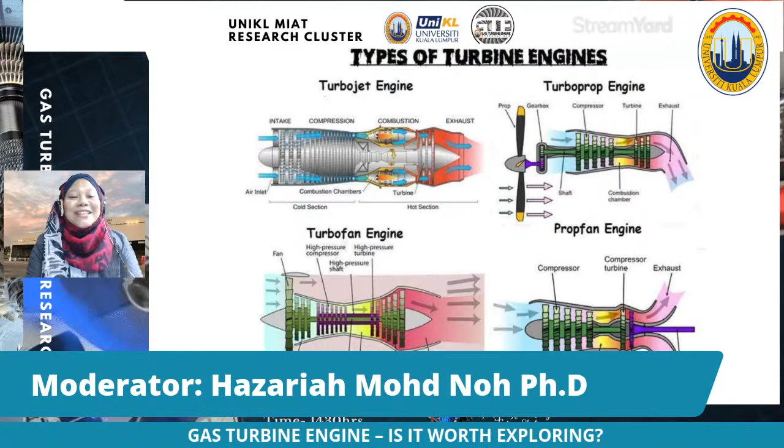A bit about the gas turbine engine: I know most of the audience are well versed in the aviation industry, some from oil and gas, and even some from power plant turbine engines. Just briefly, we have different types of turbine engines: turbojet, turboprop, turbofan, and prop fan. So we may learn more details from the panelists on what type of turbine they use in their field. As for the operation of gas turbine engines, we have power generation, aviation turbine, and also oil and gas turbine.

So, let's not waste any more time. I will call up the panelists for today. Let me stop sharing this. Okay, so I will call the first panelist up to the stage.

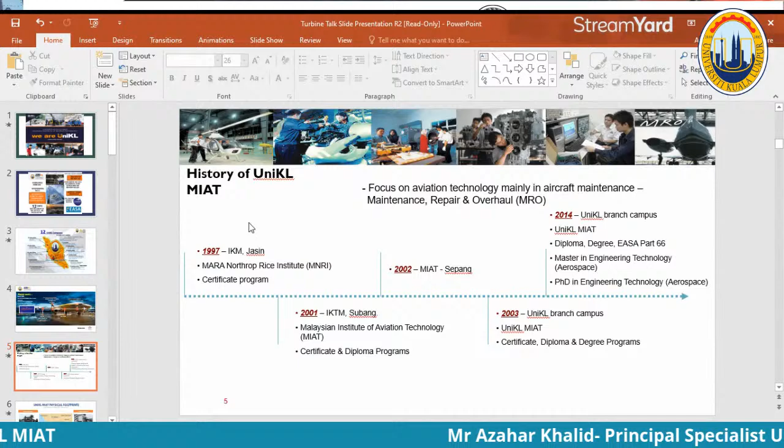This is a historical view, as mentioned earlier, going way back to 1997. It was IKM, we joined Jasin, and at that time in 1997 we only offered certificate programs. Then in 2001 we were on our own and called it Malaysian Institute of Aviation Technology. Then Mara and the government grouped us to become a university, and in 2002-2003 we became part of University Kuala Lumpur. That's the progress shown earlier on that slide.

Basically, this is our campus in Sepang. The front, the admin block, you can see from the aerial view. And over here, it's the new Subang campus, not new anymore, I think it's already 4 or 5 years. We have the admin block and also the hangar facility. The only difference here is we have the apron and we have the hangar.

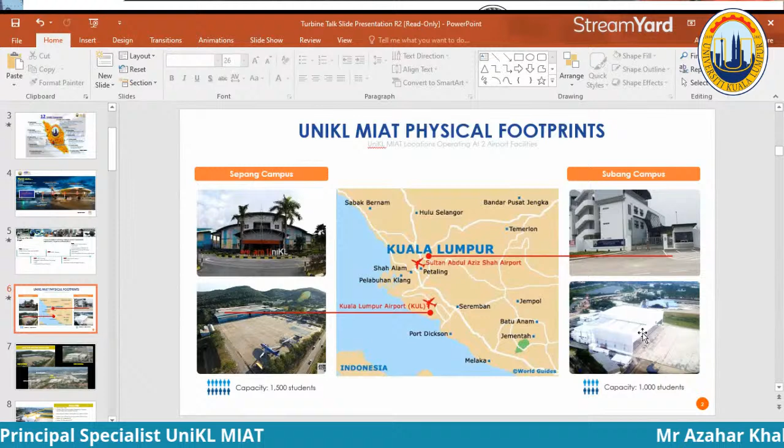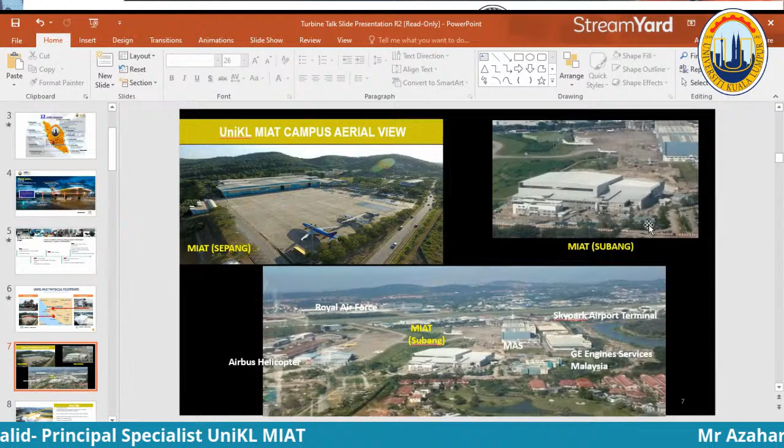This is the aerial view of Sepang, on the other aspect. Similarly with Subang, this is the overall view in Subang. The facilities we have here in Subang include the admin block, academic block, classrooms, faculty members for training workshops, the hangar support, hangar 1 and hangar 2. These two hangars are the ones where we can park one narrow body aircraft and one wide body aircraft, a Boeing 747 or 737. It's possible to go in there to have it.

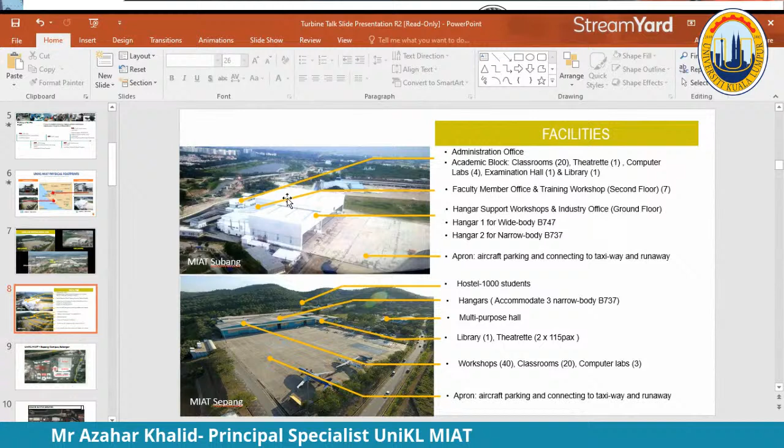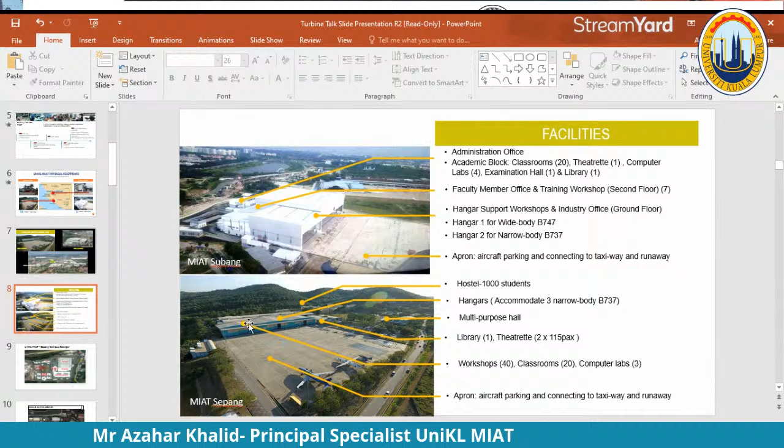Basically, the airside area is controlled, so that's where the security is. And over here is your Sepang campus, the main campus actually. You can see these are the hangar buildings, and behind it are the classes and blocks, and the workshops.

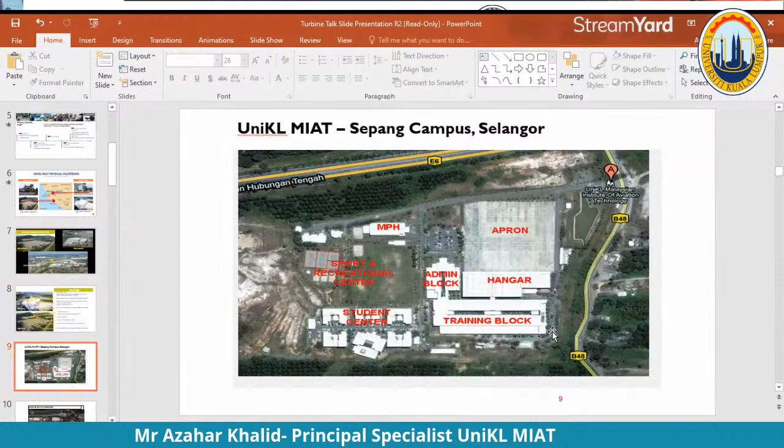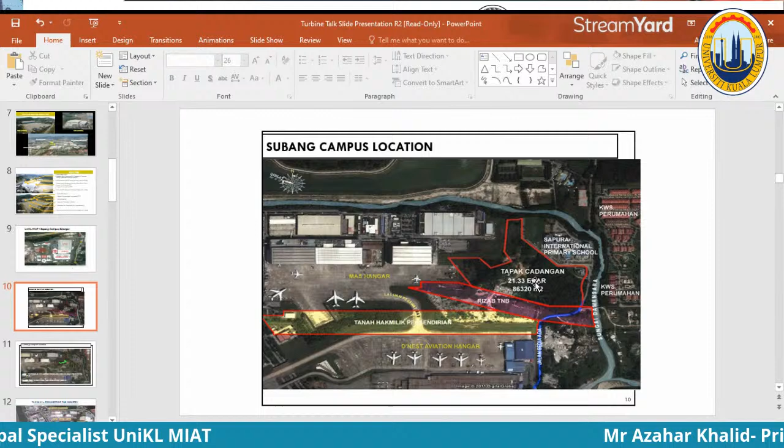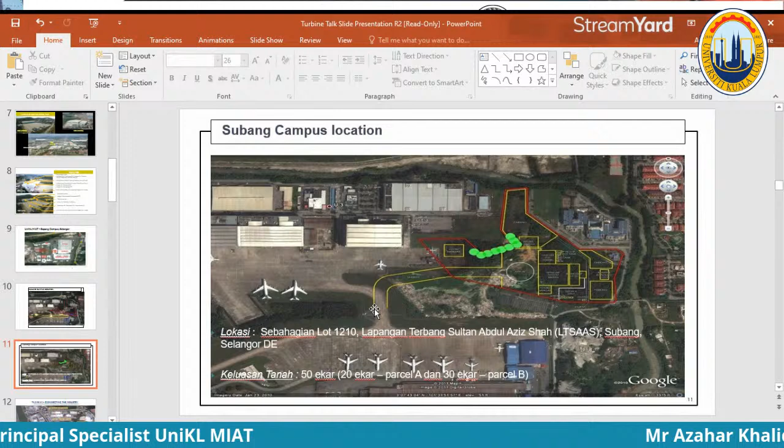Here is the earlier Sepang campus aerial view, and similarly the Subang campus. This was way back, this picture was taken before we started, when we had this only as tapak cadangan. And we just started to set up the Subang campus, way back in history. Similarly, this is the Subang campus location, the yellow part, and this is supposed to be the taxiway for the aircraft to taxi in and out.

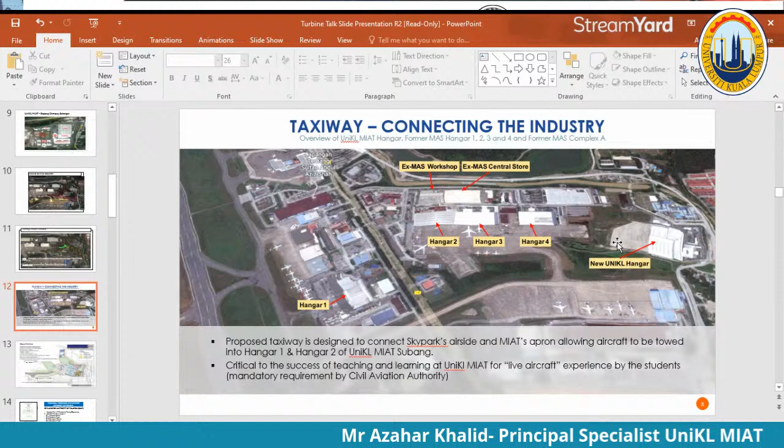The technical programs that we have are basically the CAAM, Civil Aviation Authority of Malaysia, approval 147, which is a maintenance training organization. We are authorized to conduct courses for these trades: aeroplane turbine, aeroplane piston, helicopter turbine, helicopter piston, and also avionics. These are all for maintenance engineers, so that is the approval from Civil Aviation.

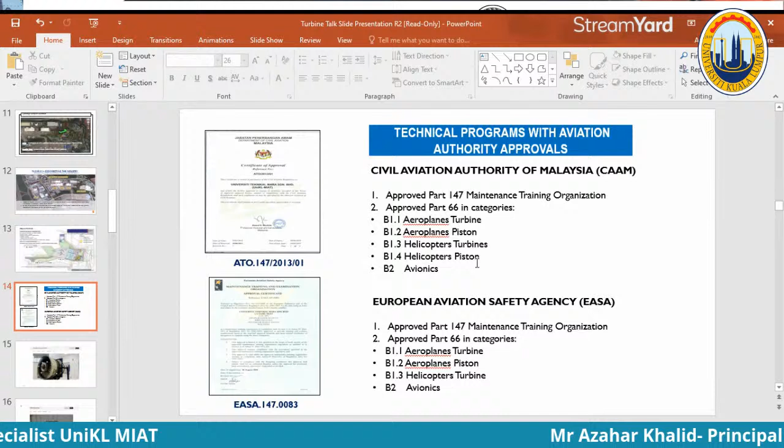Similarly, we also have EASA approval, which covers most of these, we do not have the helicopter piston. These are current, and we are conducting courses for both of these programs.

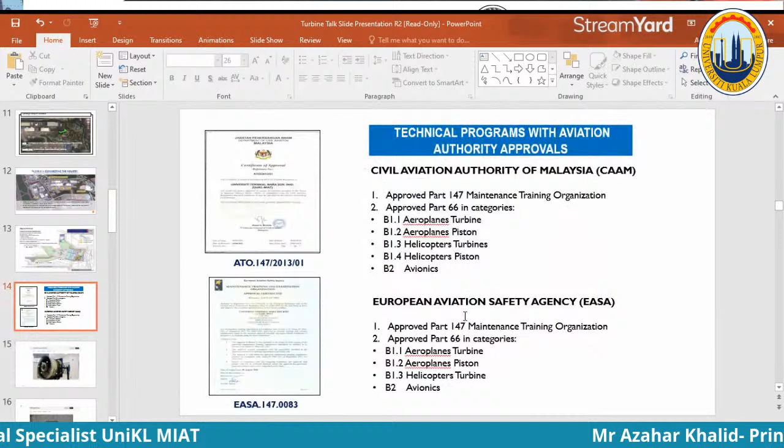Apart from that, at MIAT, being from an industry background in aviation, I have the opportunity to conduct classes. We give gas turbine classes for both the diploma and degree programs, the bachelor in aircraft engineering technology, and also for diploma programs.

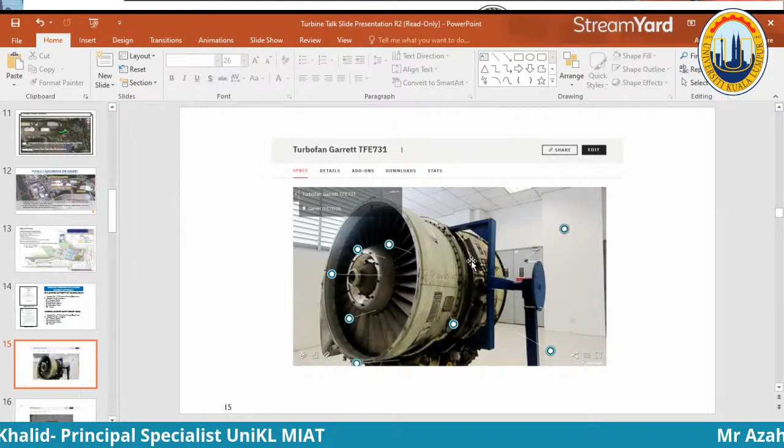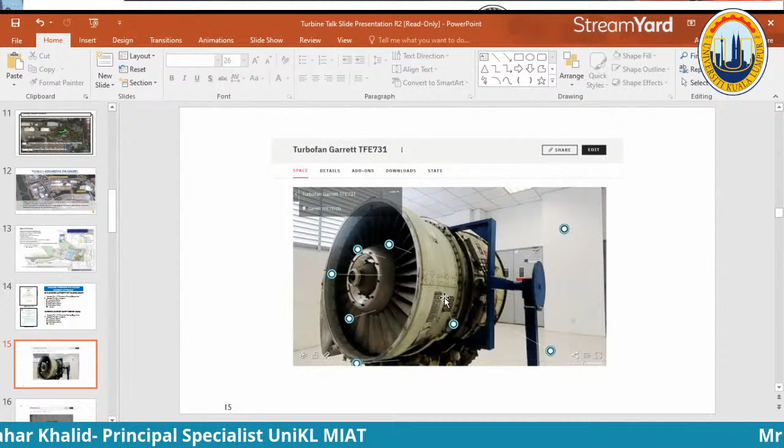So these are the workshops. This is in Subang, where we have a turbofan Garrett TFE 731. This one is static and we can disassemble it. There's also an electrical engine which is operable, so you can do a full engine run, not actually full, up to idle power, to see the operation of the engine.

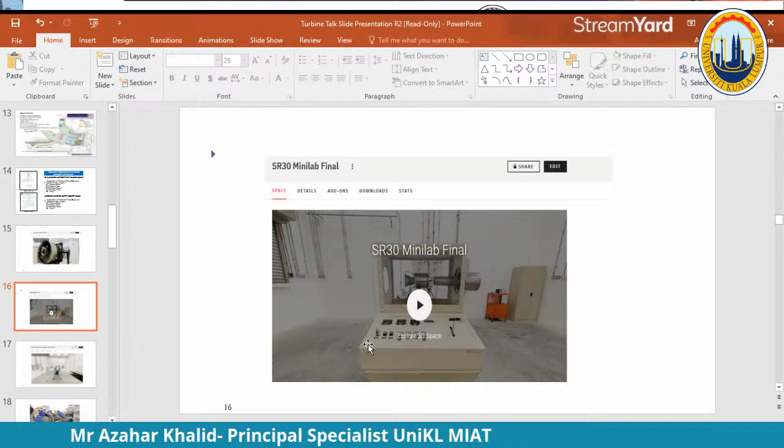So this is the mini lab, which is also stationed at the Subang campus. It's a micro turbine, made by turbine technologies, which we use for our lessons in thermodynamics. It helps in understanding the thrust and the flow of air through the turbine and so on. This is one of the equipment we use to teach the students, so they have the opportunity to understand and learn from the equipment we have. And this is another piece of equipment, a turboprop, the PT6 turboprop.

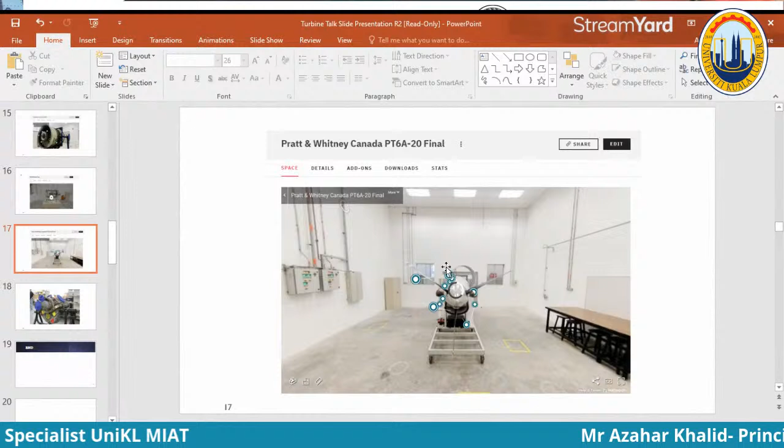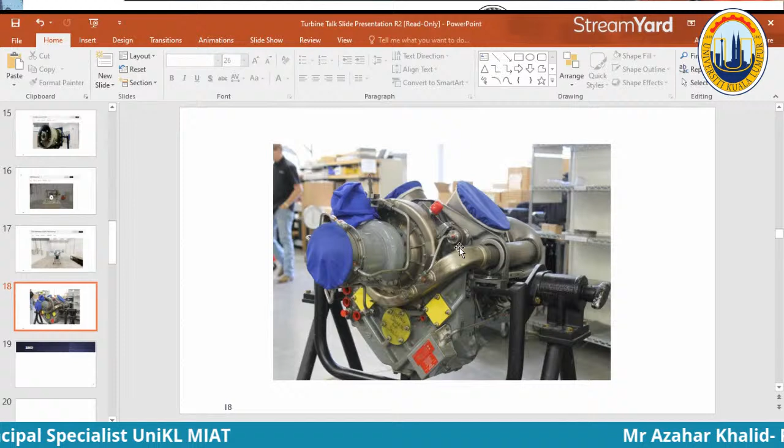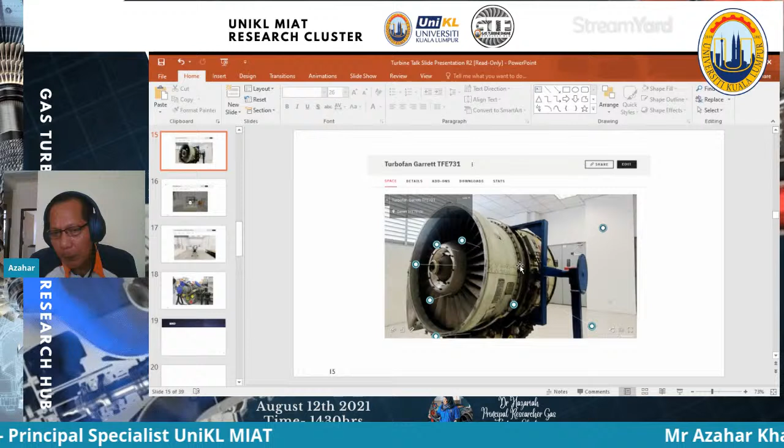So basically, these equipments are maintained in Subang and also in Sepang. We have similar equipment in Sepang, and besides our theoretical lectures in the classroom, students have the opportunity to actually work on this engine hands-on. That is the advantage of having this equipment in the university, where students now, though it's not the latest technology of gas turbine, the fundamentals are the same.

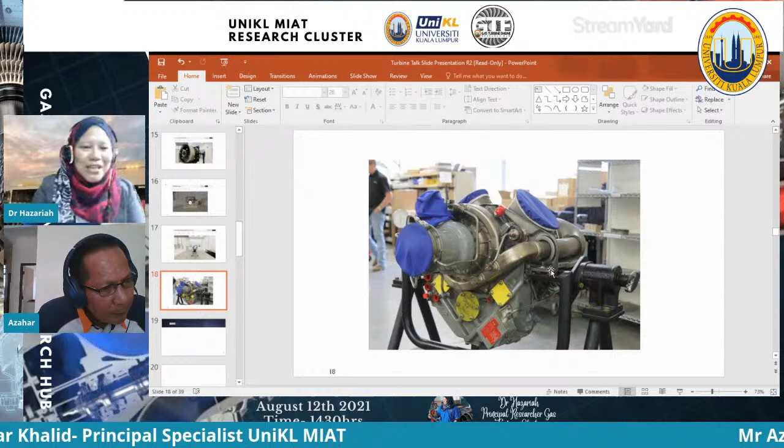So we have Dr. Harris here. Dr. Harris, I know that we at MIAT are talking about the gas turbine engine aeroderivative being used for aviation. This is very interesting, and we already have lots of comments, with close to 100 over participants watching us now. Dr. Harris, you are from the oil and gas industries, from the big companies in Malaysia, so it will be an honor to have you share with us what you did, detailing on the gas turbine engine being used at Petronas. Over to you, Dr. Harris.

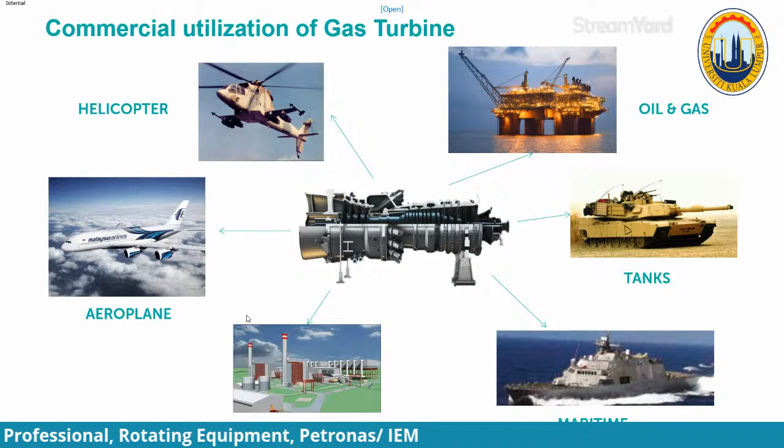There are also heavy tanks used in the Iraq war, for example. The tanks are quite heavy, so they need a big and powerful engine to make sure the tanks can drive very fast. That's why the tank is actually being driven by gas turbines.

On top of that, we also utilize gas turbine in power as well as utilities plants. And last but not least, there are also applications in the maritime where ships are actually being powered using gas turbine.

Let me touch a little bit about my own industry. This information is actually readily available on the Petronas website, but what I'm trying to explore here is to explain in terms of the major businesses that we have.

We can start with business number one, which is upstream business. This is where I am right now. From this high level overview, there are a large number of offshore platforms, almost close to 400. What we can focus on here is the number of rotating equipment as listed: approximately 83 units of compression equipment, as well as 281 power generators.

Majority of these two main equipment types actually consist of gas turbines. So you can imagine the numbers we have in oil and gas in Malaysia alone is quite a lot. Those are the platforms that utilize gas turbine as part of our power generation as well as compression equipment.

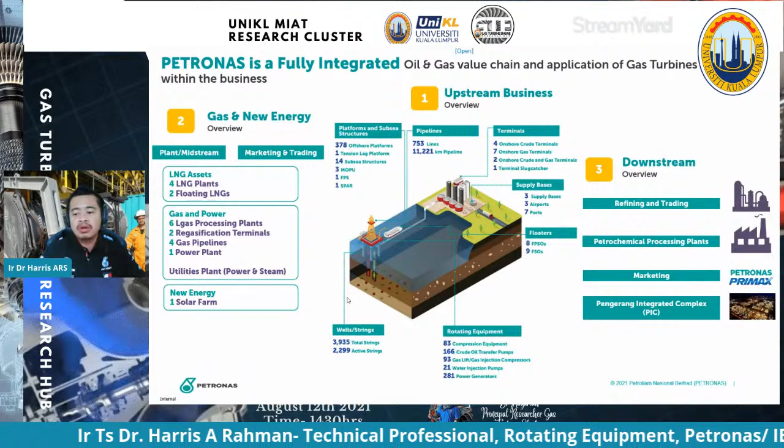On top of that, we also have our own lubrication division, where I think I have a detailed slide on that. In order to support the gas turbine industries, we also have our own lubrication oil, which is meant to be utilized for gas turbine.

The driver will always be more or less the same equipment, which is the gas turbine, but either the gas turbine will be driving mechanical equipment, either compressors or pumps, or it can also drive a generator where the generator will generate power and the power will be distributed to the designated locations.

So in order to support this gas turbine, of course you need all the auxiliaries, without which the gas turbine cannot be operated in the designated locations.

I think that will be the major difference between oil and gas application versus aviation, where usually in aviation you can see the big large engines and beneath it, of course, you have all the hydraulic system. But for oil and gas application, usually you just see a big box, the enclosure itself.

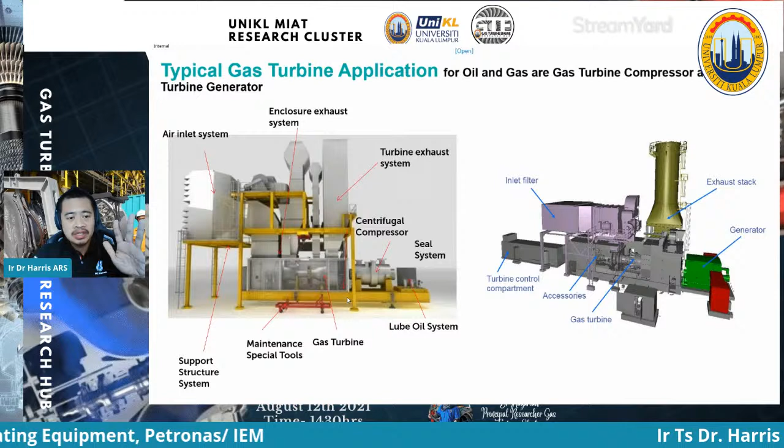You rarely see the gas turbine itself because the gas turbine is actually located inside the enclosure. Most of the time, you can only see all the auxiliary system, which is meant to support the gas turbine operation itself.

This is a thing that I touched on earlier. I'm not sure whether the crowd is aware or not, but Petronas also produces our own lubrication oil for gas turbine engines, and the oil brand is called Petronas Jenteram.

More or less, we have two major grades. One is synthetic lube oil, which is to be utilized for aeroderivative engines. And another one will be normal Jenteram, which is mineral based. It's much cheaper compared to synthetic and is meant for industrial gas turbine application.

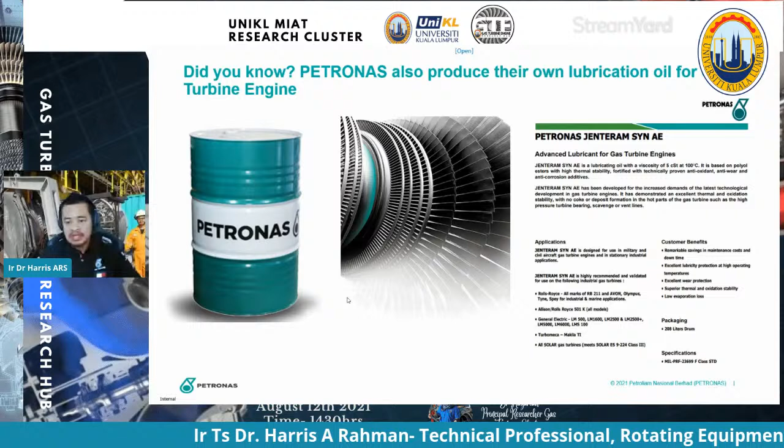Let me touch on the current latest trends in industry demands. First, as I mentioned earlier, what I'm really involved with right now is digitalization, where people start to look into how to remotely monitor equipment. This is where I am right now, based in Petronas Twin Towers, and my team is given the responsibility to monitor up to 200 plus major rotating equipment, including gas turbines, not only located in Malaysia but also in our international assets. It's quite interesting, and I think there will be large demand in this area - this is where the niche area will be that people can focus on.

Trend number two, maybe I'll touch on emissions. I think the buzzword people like to use right now is going green. We have to admit that gas turbines can also become a major contributor in terms of NOx as well as CO2 and overall emissions. But this is where we always collaborate with our technology providers - we have multiple OEMs, the major ones I always deal with being Siemens, Solar Turbines, and General Electric. We communicate and discuss with them how to control the combustion and emissions, to make sure the emissions emitted daily by the gas turbine meet the requirements set by DOE, which stands for Department of Environment.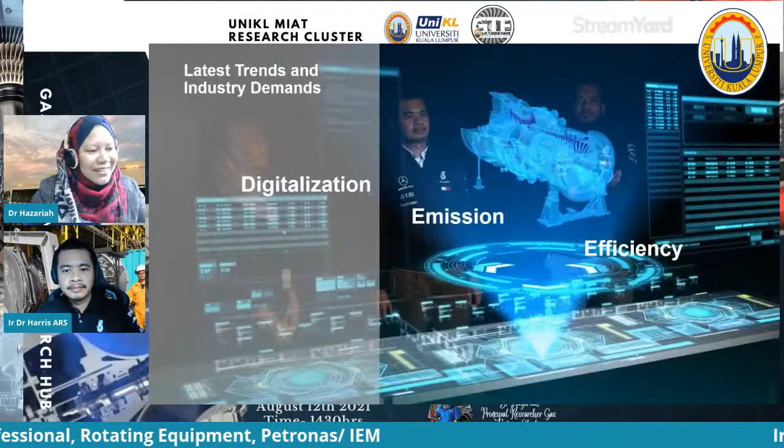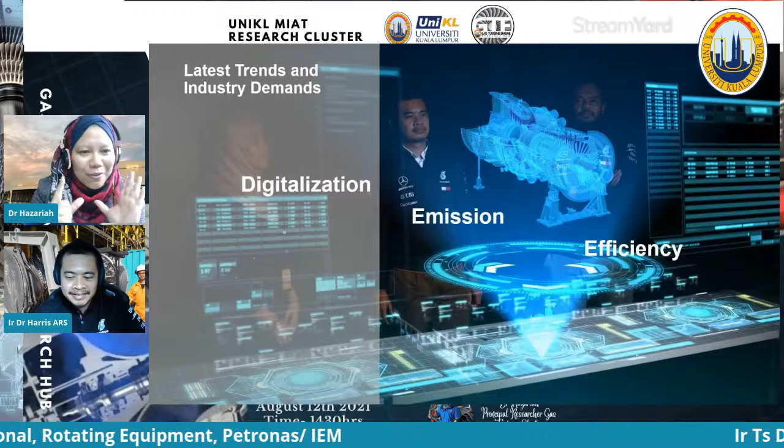Yes, exactly, this is the one they were asking me about. Is that your new project with Petronas that you were mentioning, about monitoring 200 plus rotating equipment? Is it, if I'm not mistaken, Protium? Yes, okay, alright.

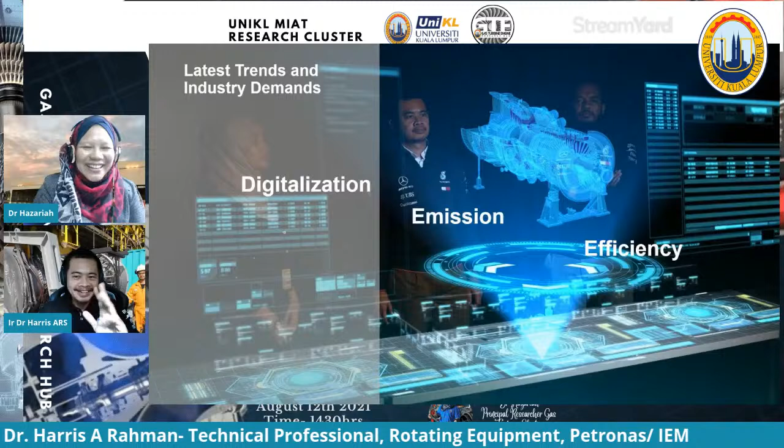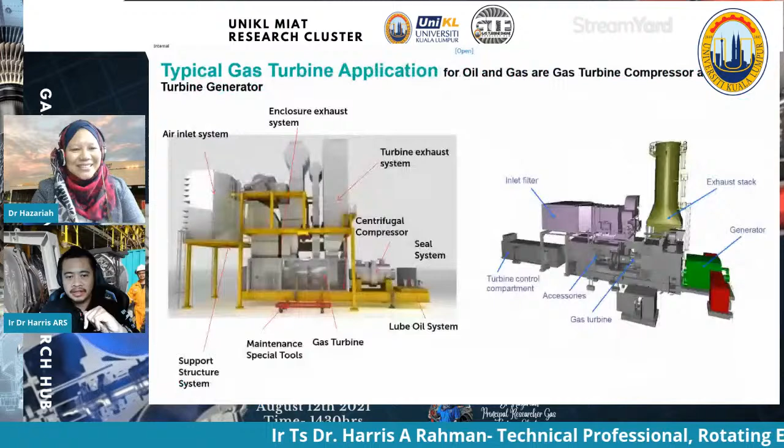Actually this is more on the marketing side. I have to admit this picture looks a little futuristic, but at least we have a dream — this is where we want to go, talking about AR or virtual reality. Our aim is to have something similar to this: instead of needing to go to site, we could have a 3D model shown in front of the whole team so we can pinpoint where the problems are and tackle them without needing to go there. What we have right now is just big screens showing data, not yet up to the 3D model. But showing that helps attract people — that's more or less the marketing we have.

But there are plans to move toward that in the near future. People are talking about virtual reality, where you wear a gadget or device and can see the virtual or digital twin of your equipment in front of you without needing to go to the site.

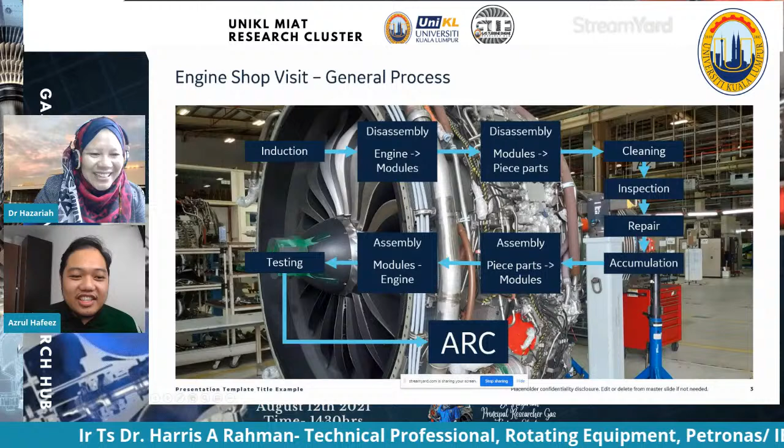You're muted, my dear. Okay, thank you, Dr. I do work in GE Aviation. First, I think we need to understand what GE Aviation does. So basically, GE Aviation...

There are two parts of GE Aviation. One is the new-make side, where they manufacture new engines, and the other is the MRO side, where we do servicing and overhaul for the engine. I am on the MRO side. Our engine shop is located in Subang, Subang Airport, just behind the old MAS complex — we are still there.

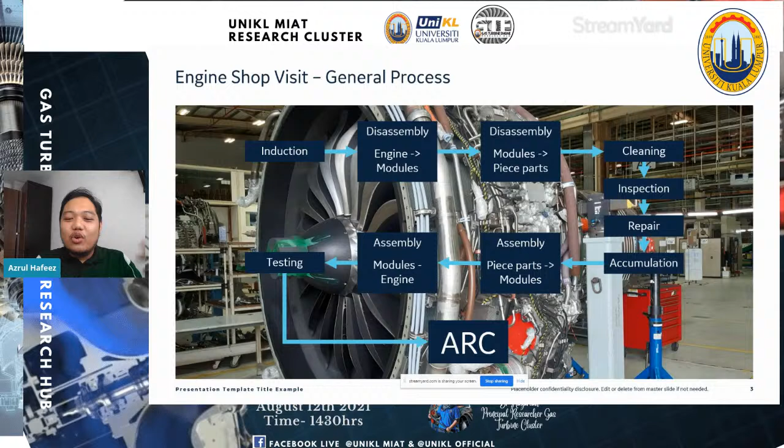So what we do is overhaul the engine. When an engine comes into our shop, there are two types: one I'd call a healthy engine, which comes in for scheduled maintenance, like when you send your car for scheduled maintenance. The other one we call the hospital engine — that's when the engine comes in with a problem like a bird strike, vibration, or an in-flight shutdown.

The one I'm going to walk you through is the normal overhaul for the healthy engine. So what we do first is the induction — this is where we plan the work scope of the engine, meaning what we are going to do with it. It's like, as Dr. Harris mentioned, sending your Honda car — when you go to the Honda service center counter, you say you want minor service or major service.

So if you say you want to go for minor service, they will tell you: okay, minor service, we will change the oil, maybe the oil filter, and so forth. So that is the work scope for minor service.

And then we have more scope for major service as well. So for engine, we have work scope for a healthy engine that's coming in for scheduled maintenance. One of it is LLP replacement - life limited part replacement, because some of the critical parts on the engine are life limited.

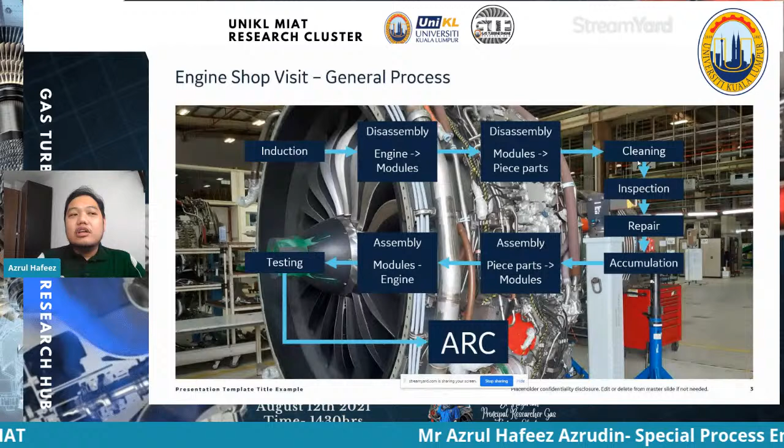After you clean the part, we push the part for inspection. This includes the NDT, non-destructive testing, for those who are familiar. Then we have the visual inspection, which is pretty straightforward, where we visually inspect with our eyes or maybe with a magnifying glass. The last portion is the dimensional inspection, where we take measurements. Sometimes a part might cosmetically and physically look good, but the dimension is out, so you cannot assemble it back onto the engine. So that's NDT, visual inspection, and dimensional inspection.

After that, let's say the part is decided serviceable, then it goes straight to the warehouse for accumulation. If the part needs repair, then we send the part for repair. If it's scrap, then it goes straight to scrap.

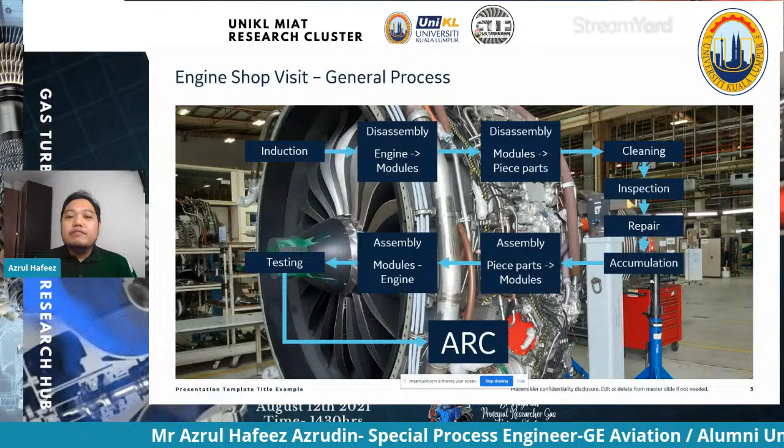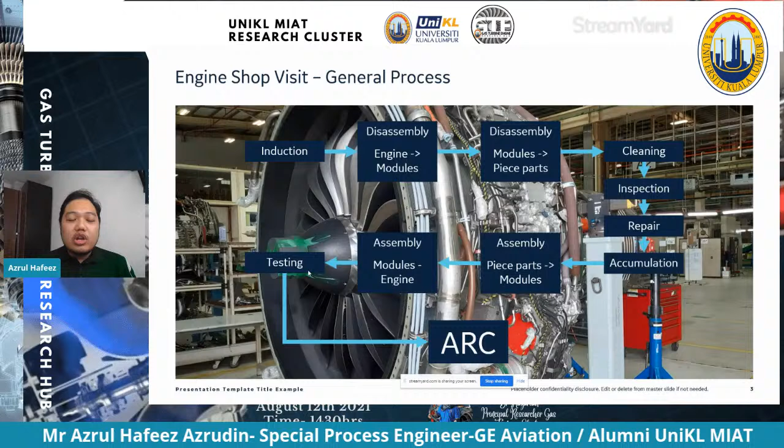After all that, we start the assembly process where we assemble the piece parts into a module, then assemble the module and install it back into the engine. After all that, the next step is testing - we send the engine to our test cell. I think as Malaysians we have the right to brag a little here, because we are the only one in the whole world, in the whole GE shop network, that has the LEAP 1A engine capability with the test cell on site.

Some GE shops around the globe have the capability to service the LEAP engine, but they do not have the test cell on site. So that's what we have - that's like our crown jewel, right? That's our selling point. So if customers want to send the engine to our shop, we can do the overhaul there, and then do the testing there, all under one roof.

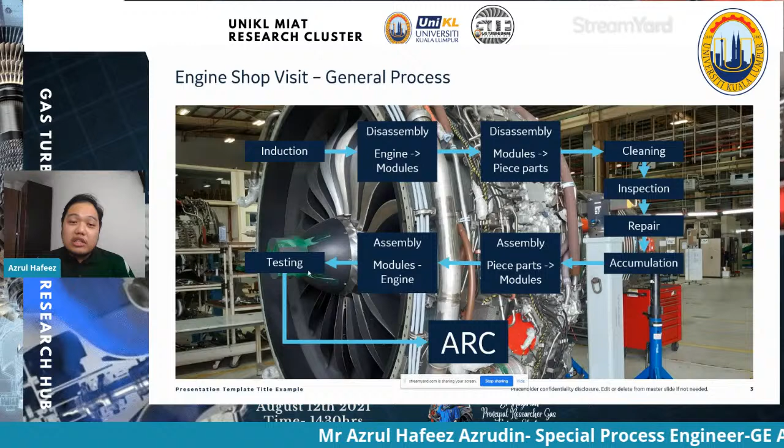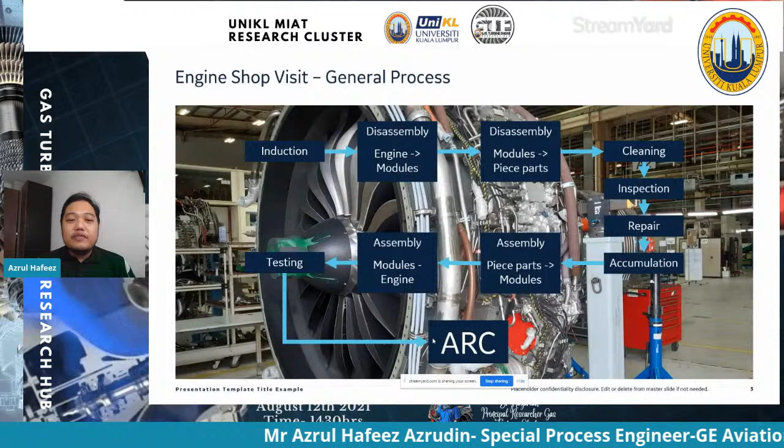Okay, and then after the testing, the most important part is the ARC. For those who didn't know, ARC is basically the certification process. ARC is the certification to say that this engine is safe to fly, safe to operate. So that is the most important one.

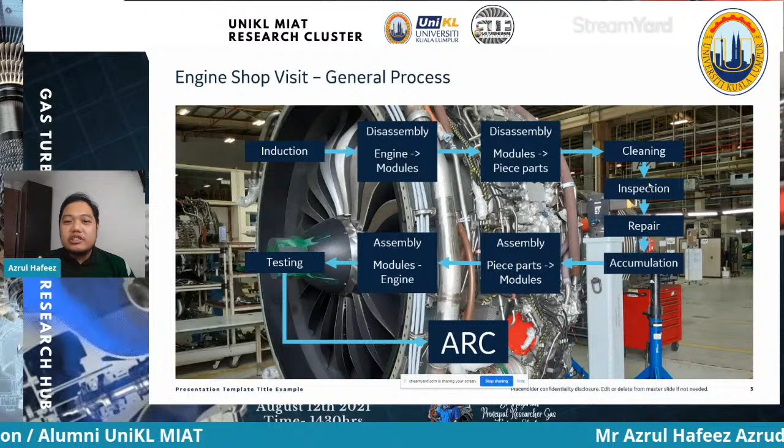Okay, so moving on, let's go back to the cleaning inspection, where I was involved in GE Aviation. In cleaning, I provide technical solutions regarding the cleaning process. Sometimes we have what we call insufficient cleaning. Most aviation guys, even students, know that we have to do everything as per the manual, according to the manual.

But the manual is not perfect - it's written by humans as well, so sometimes it's not perfect. There are some flaws, and sometimes when they write the manual they do not foresee what's going to happen on that engine during operation. So sometimes we end up with part conditions that were not foreseen, and that's why we sometimes end up with insufficient cleaning - the cleaning method provided by the manual is not sufficient to clean those parts. That's where I came in, to tell them how to clean the part, in layman terms.

But being a special process, there are several parameters you have to watch out for - the material of the part, what chemical you want to use on it. So let me share one of my mistakes during my first year as a special process engineer. We accidentally put a part in the wrong chemical on titanium parts, and dunked it inside the chemical tank.

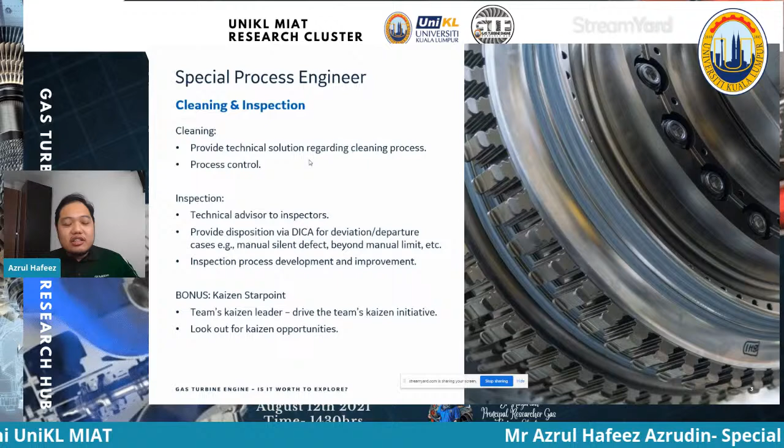Okay, so this is where you have to apply some technical knowledge when you want to make disposition. You have to identify what type of defect, how the defect occurred, and what are the chances to get the defect repaired. Because your technical knowledge is one thing, and you have your workload as well, so you have to balance that out. So it's good if you have a good technical background or technical knowledge for you to make that quick decision.

All right, sometimes when you see the part with the defect, you know it's not worth it, not worth your time to go through all the hassle to salvage your part. So you just straight away scrap the part. So all that experience and technical knowledge will surely help you to make all those quick decisions. And then the next one is inspection process development and improvement.

The manual only tells you what to inspect for, but it's us that have to come up with our own inspection process - what machine to use. Plus now with IR 4.0, Industrial Revolution 4.0, we are trying to digitalize most of the equipment. Some equipment we already digitalized.

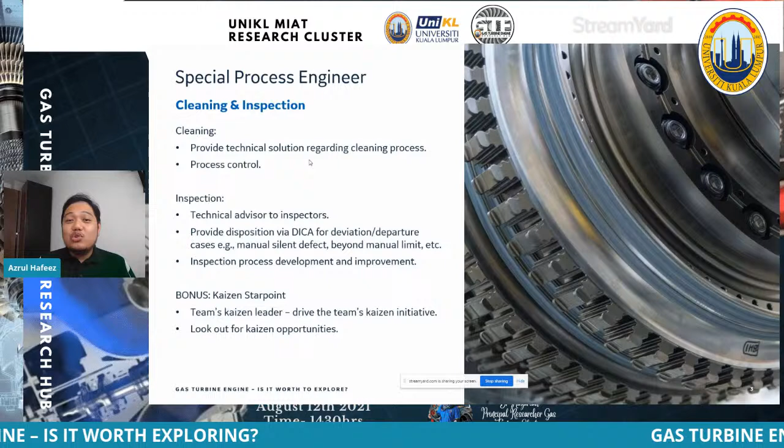For example, how to measure depth. Before this, we used the normal depth gauge. Now we have a 4D tool where we can scan the surface and a 3D surface pops up on the screen, so you can measure your depth straight away.

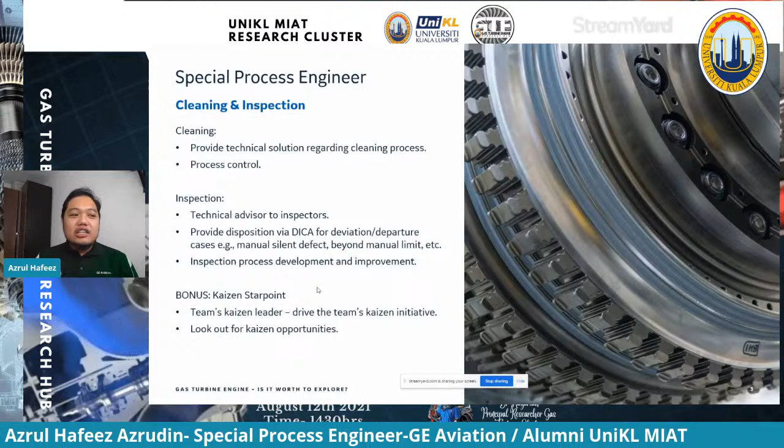And the last one, some bonus function - my role in GE as a Kaizen Starpoint. Kaizen, some of you guys might know, is a lean thing. I encourage students to Google what Kaizen is, because it's a big thing in the industry. So that's all for me - that's my background, what I do in GE Aviation. Thank you.

Okay, actually I'm smiling all the way back from the stage because we received a few questions related to your field, and I think I have to come out to the stage and say you might want to wrap up a bit. As we will keep the questions towards the end of the session.

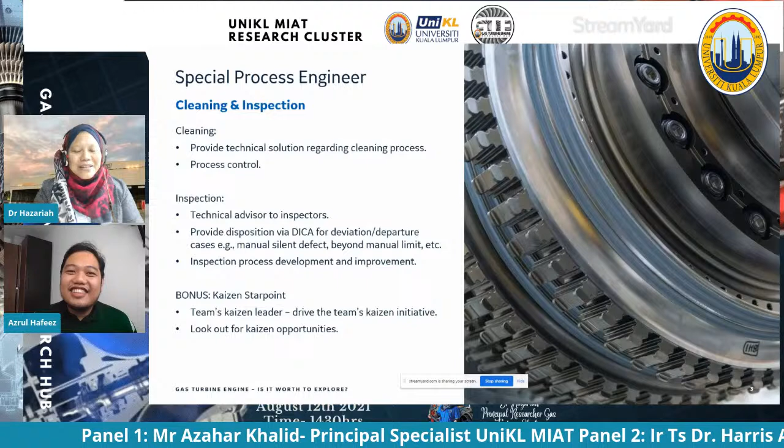Basically, if following the schedule, we have only 1.5 hours. But listening to what the speakers have been mentioning - Azrul, Dr. Harris just now, Mr. Azhar - there's lots of interesting information. Azrul, we'll catch up with you later, be prepared with the questions, we'll take the questions later. Thank you so much, you're all welcome.

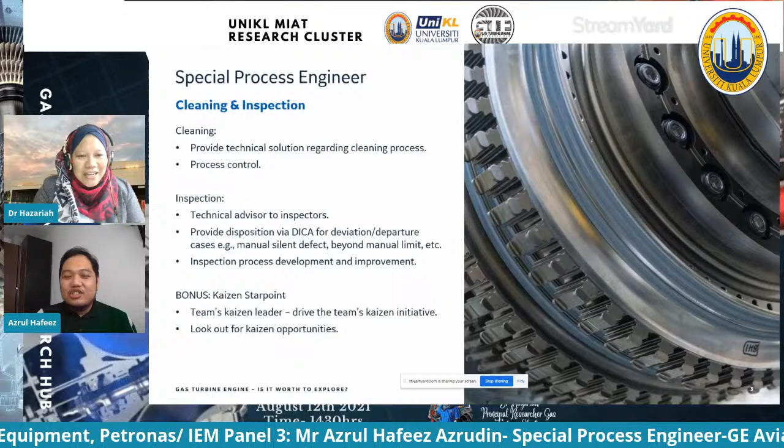Dr. Harris, I might need to call you up because I think Che Azhar is having problems with the internet. Dr. Harris, we received a lot of questions, but let me go through the ones already identified earlier. We know that when we talk about power generation or turbines used in oil and gas, our approach with aviation is slightly different. But during your presentation, you did mention about digital transformation and such.

So what do you think of continuing education on digital transformation, which I think is crucial at this moment? Can you elaborate more? In terms of injecting data science into the current education system - I think that's the question being asked. So if you look in, I can explain based on what I see right now. Most of my teams, because I have a complete team, consist of data analysts plus rotating experts or rotating engineers. We need a combination of both, because in order to monitor any equipment, you cannot rely simply on technical know-how. You need someone who also has depth knowledge in terms of data science itself.

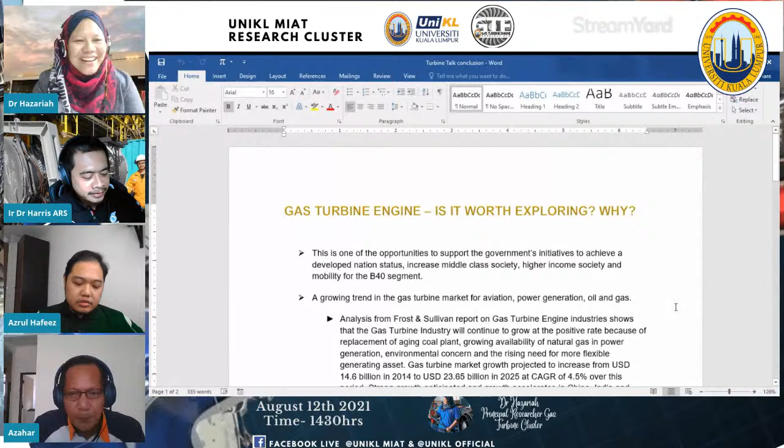Yes, did you already? Okay, wait. Okay, you prepared. Okay, you can see now?

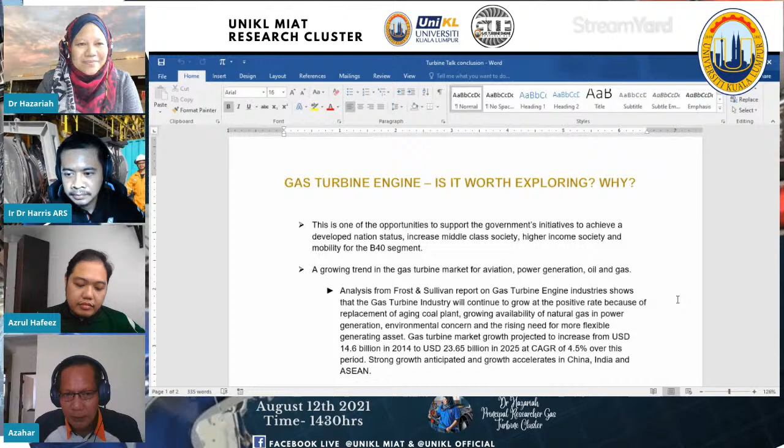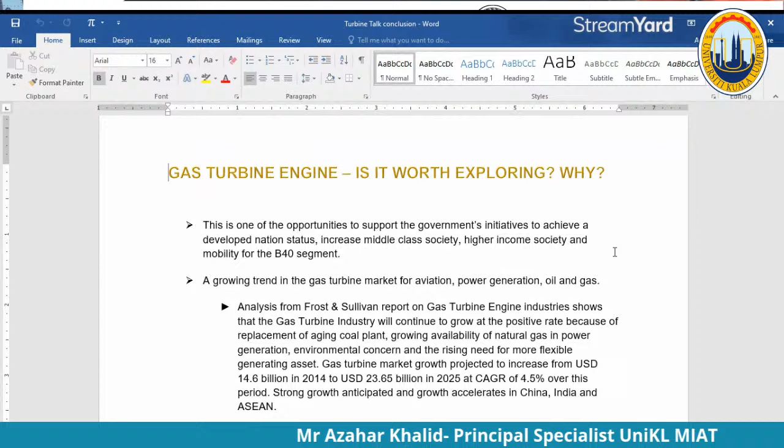Yes. Okay, basically gas turbine is one of the opportunities to support government initiatives. I think it's a very sophisticated piece of machine and engine. There's a lot of improvement and opportunity in terms of developing a nation's status, increasing the middle class society, increasing high income society. So those are the opportunities I think we will find in aviation, in oil and gas, and also power generation - not saying that the other professions are lower, but these are the opportunities.

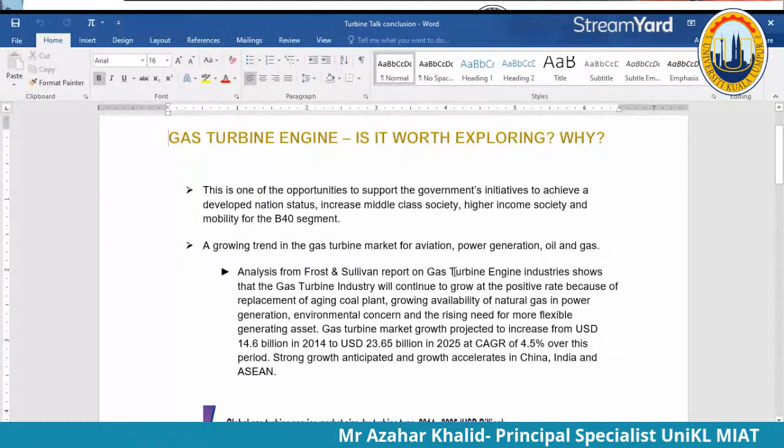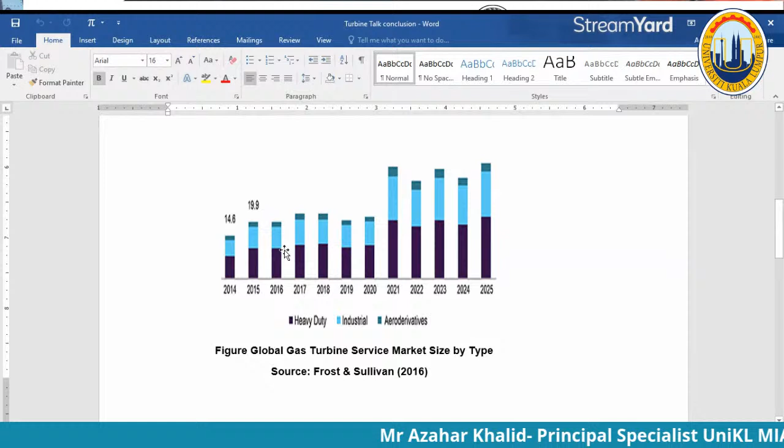There is a growing trend in the gas turbine market for aviation power generation. As you can see here, this is from Frost and Sullivan, in terms of this gas turbine market, 14.6 billion US dollars in 2014, projected to reach 23.65 billion.

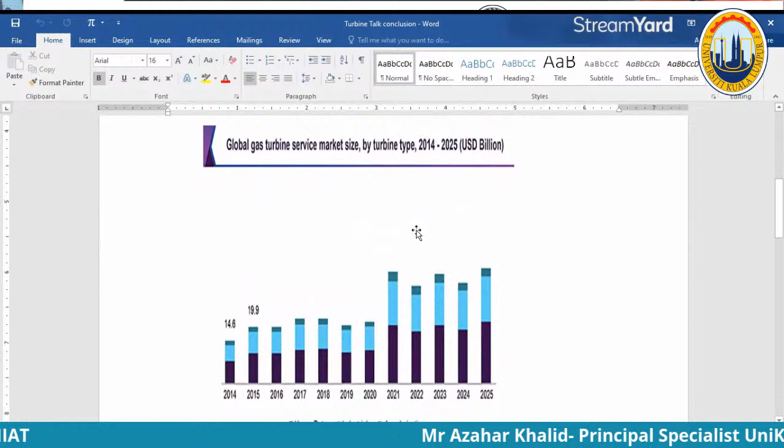Of course, now with the pandemic, there's a slowdown this year, 2021, probably about 30% or 40% slowdown, and a lot of airlines have cancelled their orders. But as far as aviation and power generation, the growth will be there. It's a matter of cyclic effect. So I see no reason we should not explore this trade.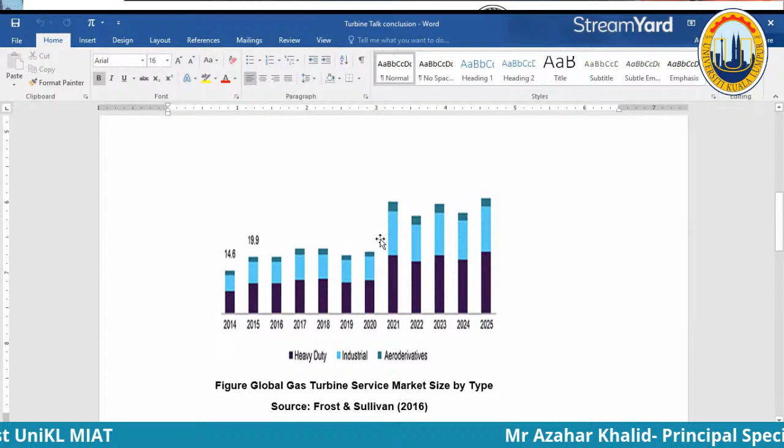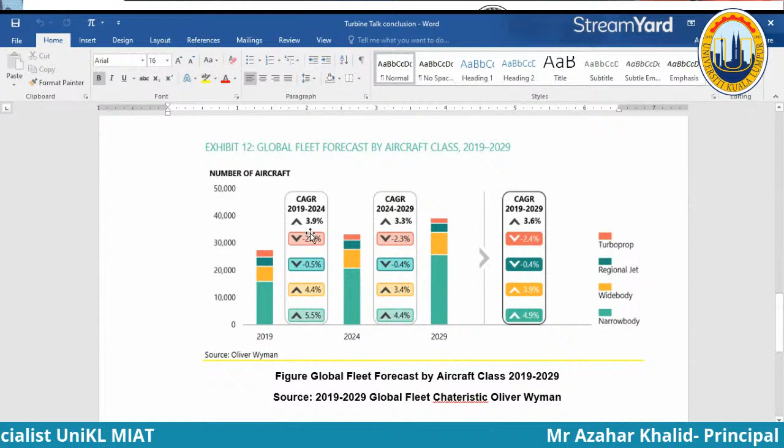And similarly, on aircraft for aviation, there's a rise, a steady rise of 3.9%. It may drop lower for a while, but there's a time where it will pick up. I think probably 3 to 5 years from today, you will see this moving up.

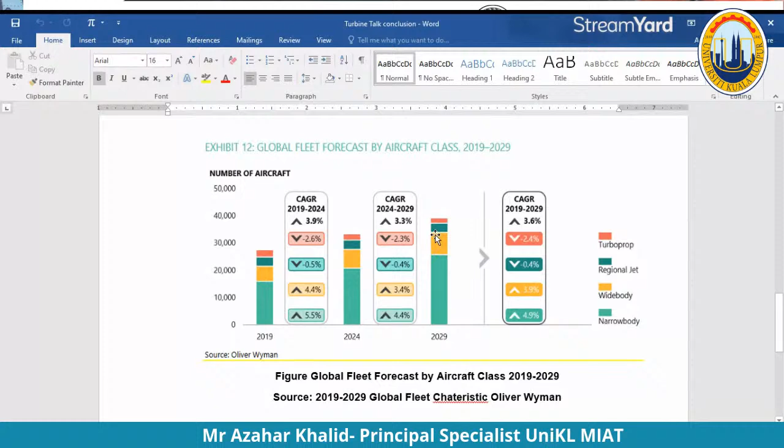Thirdly, aviation has always been there from the beginning, established so long. And the gas turbine is finding increasing application on power generation, oil and gas, chemical process, and so on. So there will be growth, no way we can deny that.

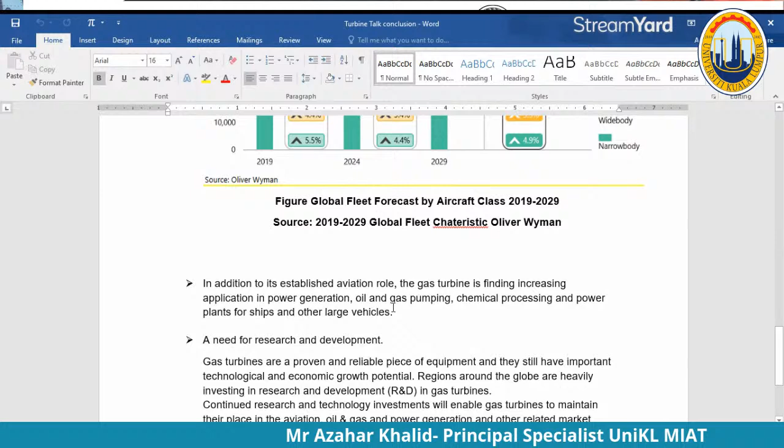And finally, for any equipment or product, research and development is a must. So I see gas turbines have proven a reliable piece of equipment that still has important technological and economic growth potential. You're talking about power generation, single cycle 40%, with combined cycle even higher. So there's always been potential in the development of gas turbine.

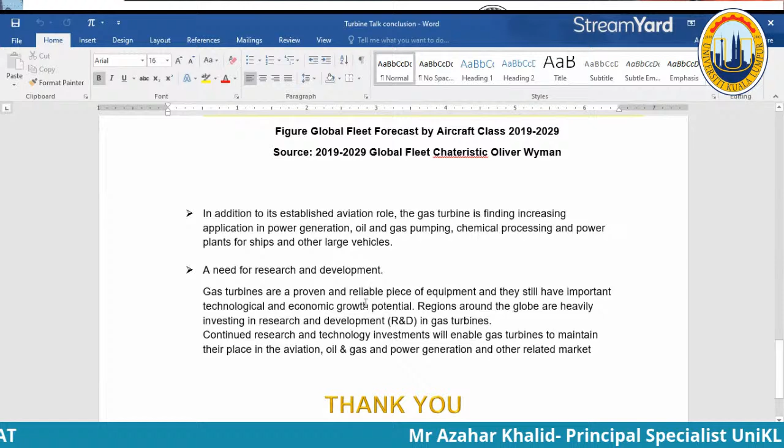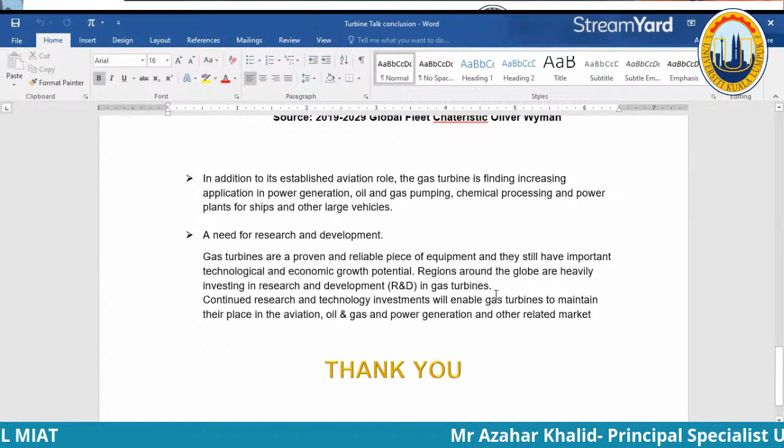And that's it, I think we should not back off. I think Malaysia should seriously focus in these areas. I think we are more on the maintenance and operation side, and we should go more towards the development of this equipment. All right, thank you very much.